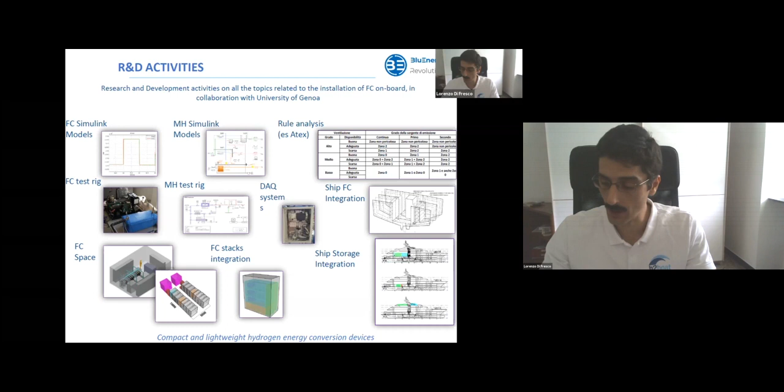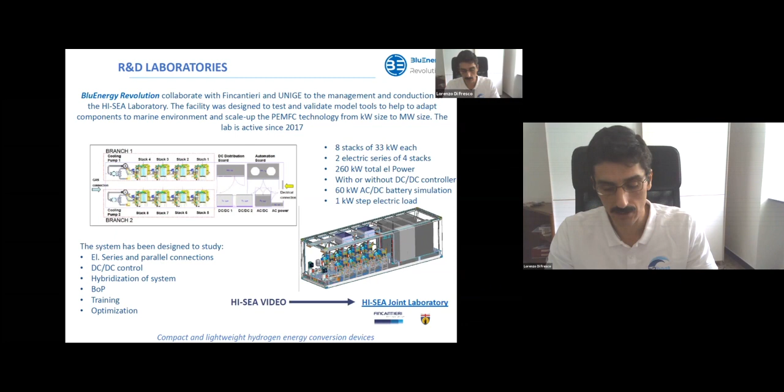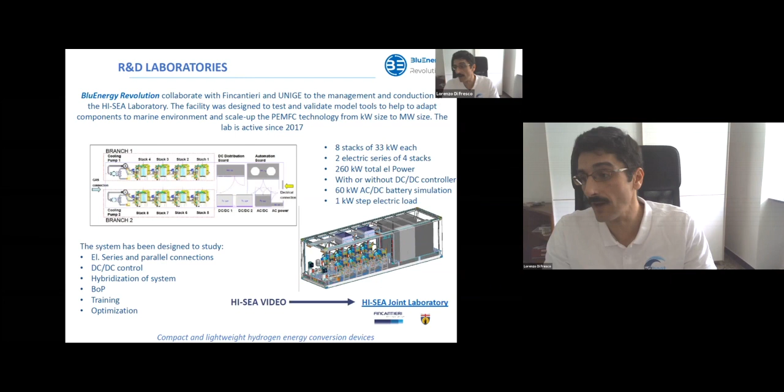So our activity starts from software simulation with Simulink and MATLAB, and then from there we develop mock-ups and prototypes up to the experimental phase that happens in our laboratory, which is equipped with fuel cell stacks and DC-DC converters. We also have special tools to test the equipment, for example, in marine conditions, an environment that can reproduce the final destination of our system.

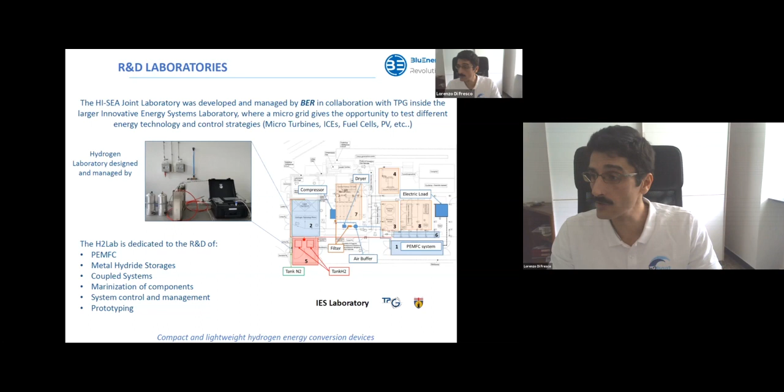The laboratory, moreover, is based on this campus, where a microgrid is in place, including a microturbine, internal combustion engine, renewable energy generators, and heat, thermal storage and electrical storage. So we can also develop solutions for land and domestic applications. Mainly we use proton exchange membrane fuel cells, and we believe that metal hydride storage offers good opportunities for hydrogen storage due to its specific characteristics, allowing storage at low pressure and low temperature.

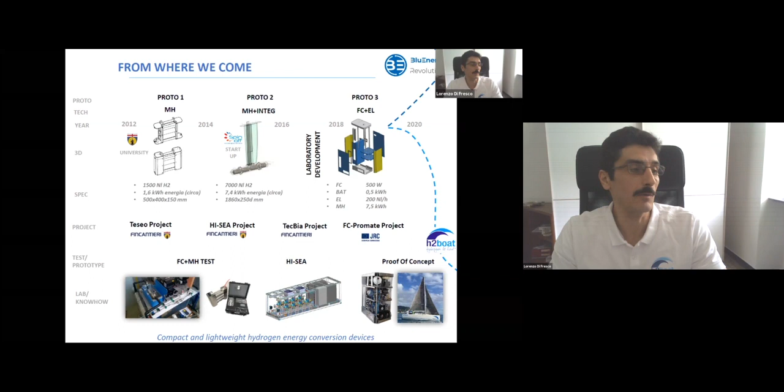Our history in the development of our energy pack started in 2012, when we first dealt with hydrogen storage with metal hydride, and we developed some studies for Fincantieri within the Teseo project.

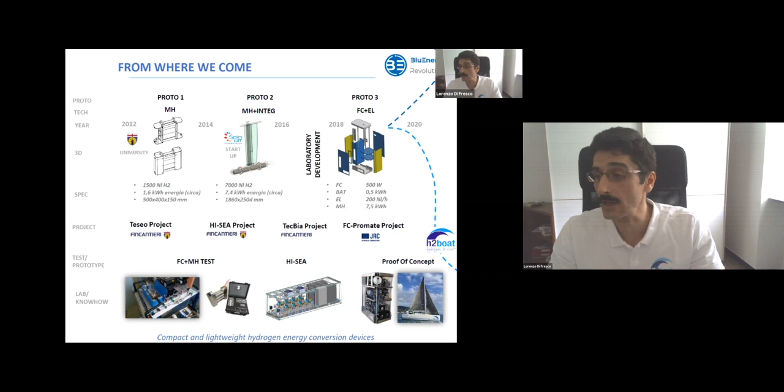And from then we continued to develop our idea on the side of prototyping and developing the H2Boat energy pack, passing through integration in the bulb and keel of a boat, and then arriving at putting together all the components in a box to provide the hydrogen supply, the storage, and all the balance of system that is now integrated in a boat, and we demonstrated it works.

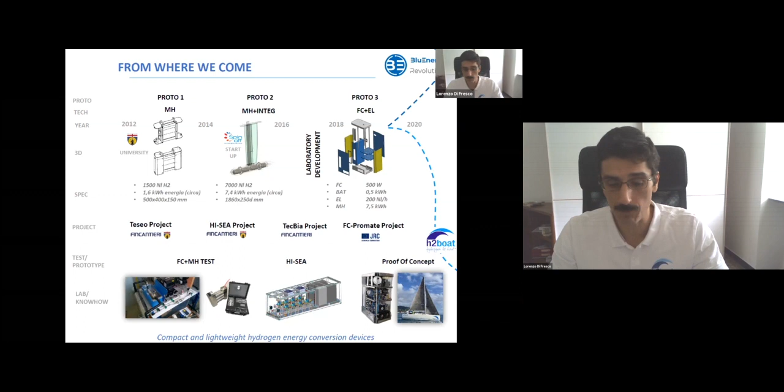Within the year, we also developed a study for terrestrial application, and application in a large vessel and ship.

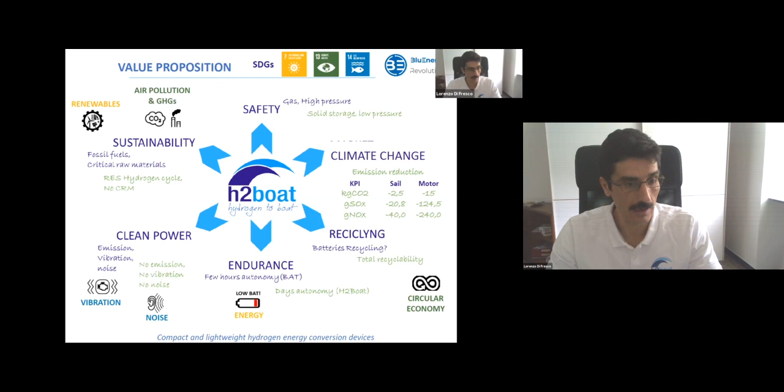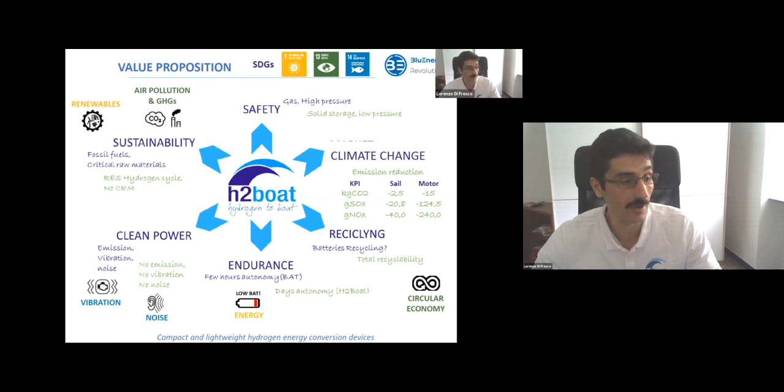Our value proposition is addressed to sustainability, environmental sustainability, safety, and the climate change issue, so decreasing emissions and decreasing the utilization of fossil fuels. We trust in a circular economy based also on the evaluation of the life cycle of a technology, considering not only the performance during its operation, but also the impact when the component is at the end of its life. We trust that it's possible to provide power in a clean way, not only respecting emissions in terms of pollution, but also from an aspect of comfort, providing power with no noise and no vibration. This can be some added value to all the other aspects and features of a technology for energy conversion and production.

So our solution, according to our value proposal, is given by hydrogen technology, exploiting the virtuous cycle of water electrolysis. We aim to produce hydrogen from water, using electrical power input from renewable energy, and then be able to use this hydrogen in a proton exchange membrane fuel cell. In our H2Boat product, we think that with this system we can make a boat zero emission and also independent from any energy source, so it's not necessary to go back onshore for providing the storage of fuel and so on.

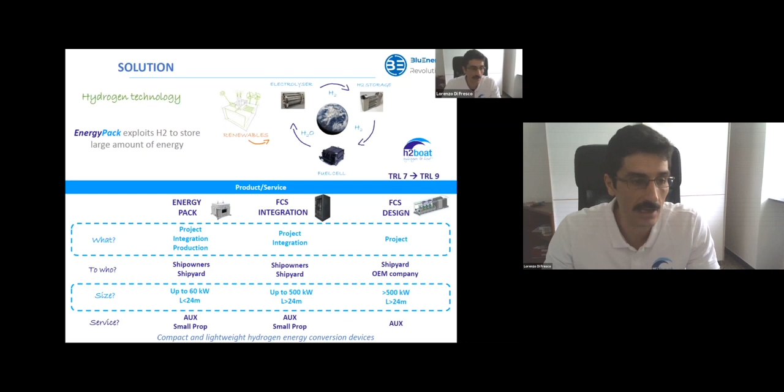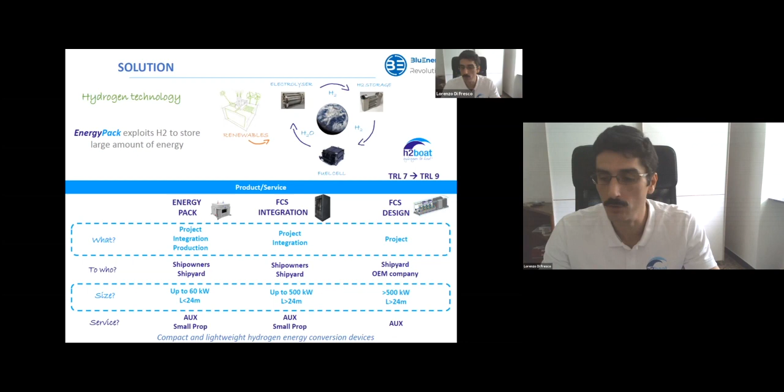So we propose different solutions in terms of hydrogen technology for the marine sector. We have the energy pack, a complete system with storage, electrolyzer, and fuel cell to provide auxiliary power and also propulsion for sailboats up to 24 meters. We also consider that hydrogen can be a good solution for the power needs of a larger boat - not for propulsion, which involves very large power rates, but we can integrate a fuel cell system for hotel service in big motor yachts and also in some large ships.

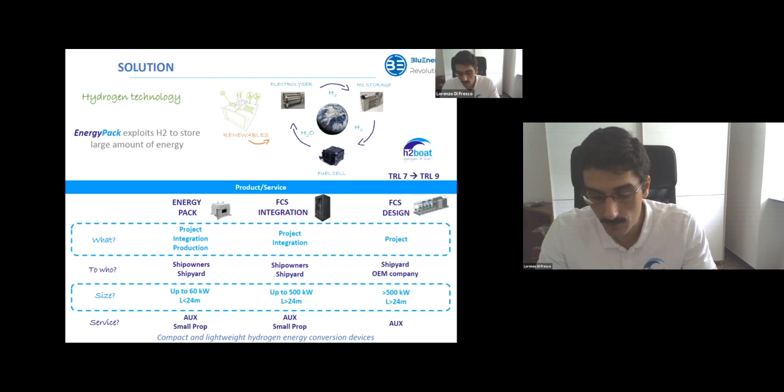The benefit of such a system is not only in the environmental acceptability of their performance, but also because it increases the comfort of the guests of a boat or vessel when the engines are shut down, because this electric generator can work without emitting noise, smell, or vibration - a new concept of comfort for such a technology.

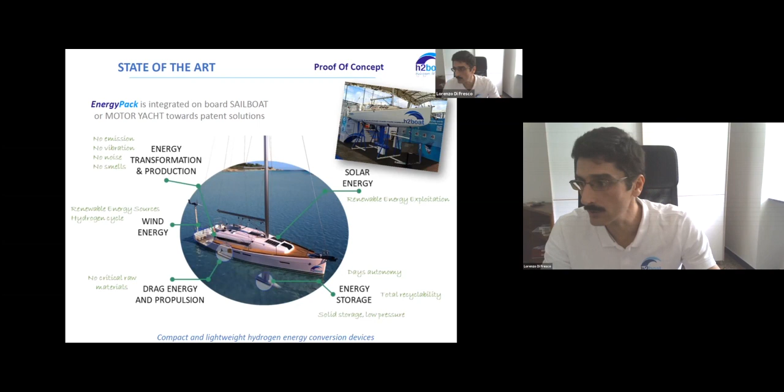...installed on the boat - all this system, during the day or the night, can harvest energy in a larger or smaller amount and keep it stored efficiently in an energy storage placed in a safe spot out of the board, in the bulb of the boat. This way is pretty smart, because this storage solution gives a double function to some component that is already needed in a boat, improving its performance, and also allows the storage of hydrogen in a safe manner, because it is at low temperature and low pressure.

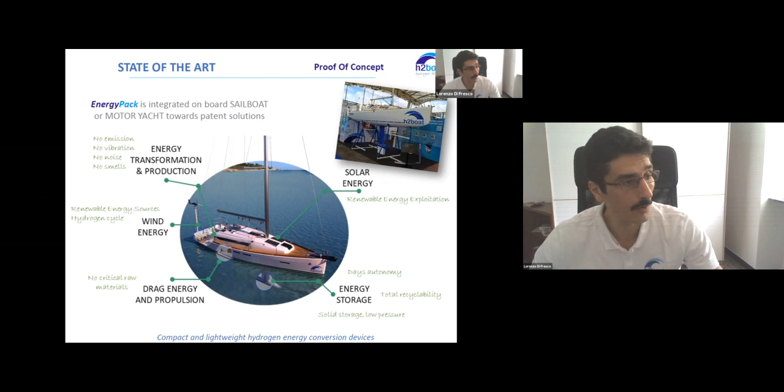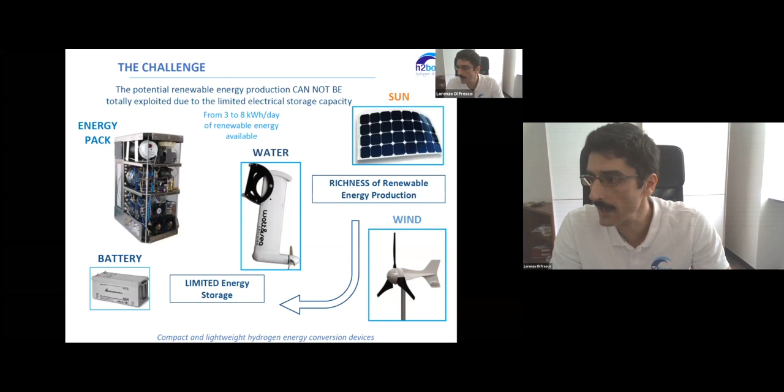Then the other components are the renewable energy generator that collect the energy from sun, water, and wind. And of course, we still have a small battery, not for storing the energy, but just to allow the regular operation of the balance of system governing the hydrogen network that we realize on board.

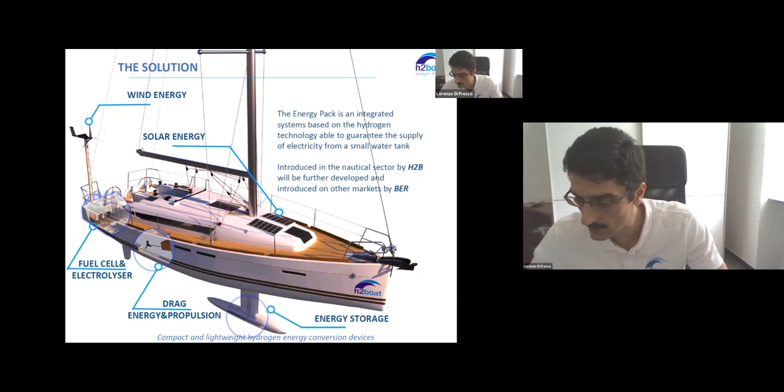Let's think about the refrigerator, the water desalinization unit, or the lights, and all this kind of aspect. And more than this, while you are sailing, you are recovering and regenerating the energy that you are consuming. This is the main innovation for the H2Boat solution.

Is a bulb that encase metal hydride storage. The metal hydride is a very heavy material, so for this application is ideal, because is only a little bit lighter than lead, that is the preferred material for such a nautical component. And with this kind of storage, we get very high performance in terms of storage capacity.

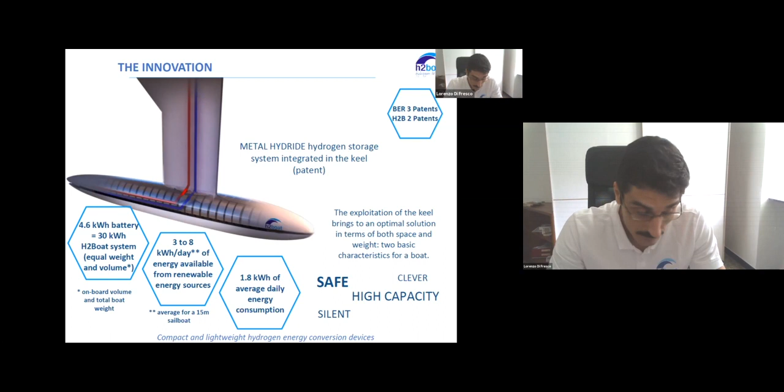If you compare to a standard battery, respect the 4.6 kilowatt hour that you can put in a big box of battery, in the same volume, you can store up to 6-7 times the amount of energy.

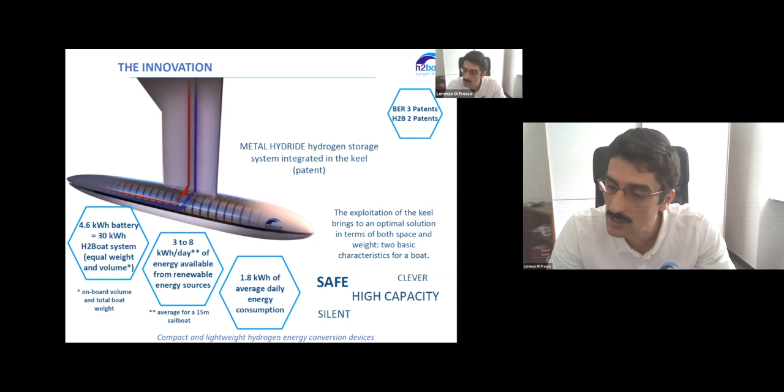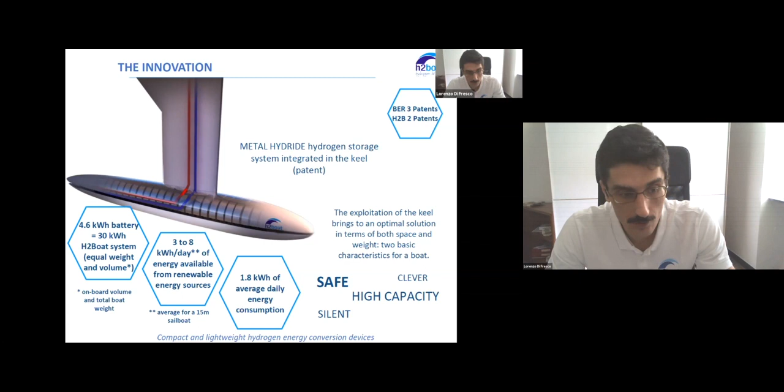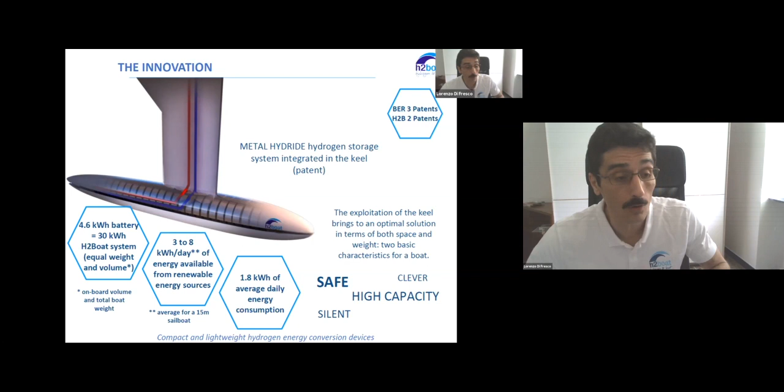And then I remind to you that when you sailing with a boat of a small, medium size, 15-20 meter, you are able to catch from the environment up to 8 kilowatt-hour a day, while the standard average need for a sailboat of this size doesn't reach 2 kilowatt-hour of energy consumption a day. So you can actually improve a lot the energy performance of your boat in a safe, clever, and silent manner.

The boat is 7 meter long, uses a fuel cell of 1 kilowatt power with 7.5 kilowatt hour of energy storage in the bulb. The bulb weighs something less than 500 kilos and has a length of 1.8 meter with a diameter of 25 centimeters. So it's also very performing from a hydrodynamic point of view.

Also, I can show you a short video where you can see all the benefit and the feature of our system. Hope I can show you correctly the screen. And if the video